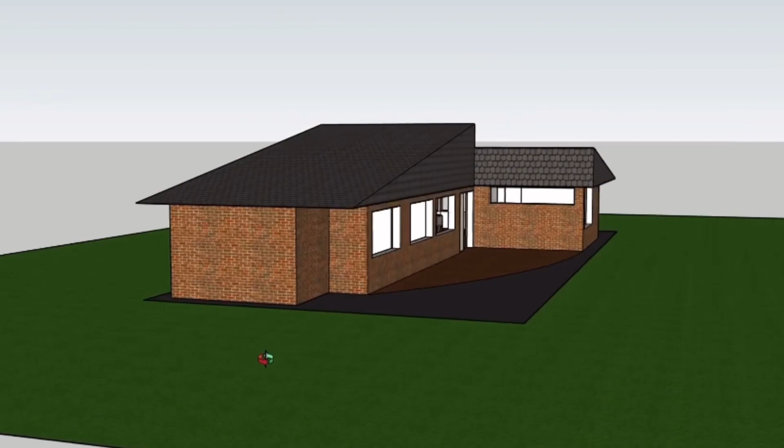Neil deGrasse Tyson is an American astrophysicist and an author of numerous science books. He has a family of 4 consisting of his spouse and his 2 independent children, Travis and Miranda Tyson. His hobbies include stargazing, reading science fiction literature, calligraphy, and wine tasting. Neil commonly appears in podcasts and television programs where he enjoys socializing and informing people about the universe.

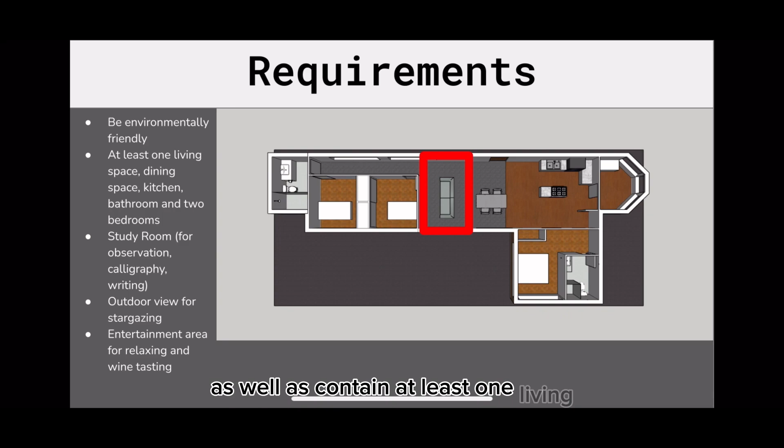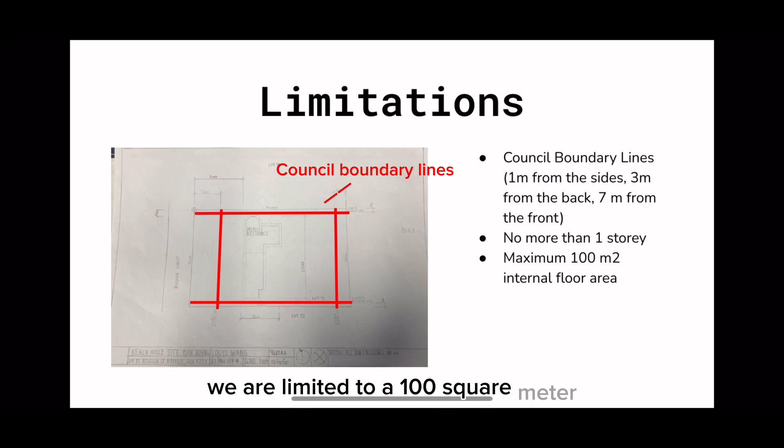Our design must be environmentally friendly and abide by open plan living principles, as well as contain at least 1 living, dining, and kitchen space, a bathroom, and 2 bedrooms. Neil prefers if we include a study room with large windows for his hobbies, a view of the beach, and an entertainment area. In addition, we are limited to a 100 square meter internal floor area, only 1 story, and the council boundary lines.

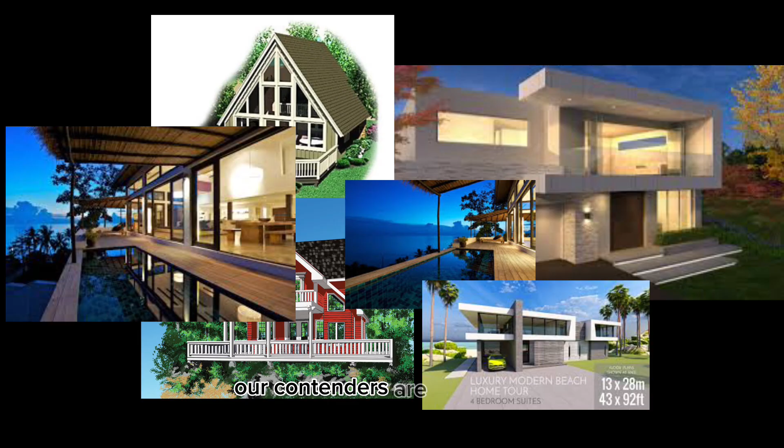When it comes to beach house designs, our contenders are the modern, tropical, and chalet designs. Considering Neil deGrasse Tyson's inclinations, the tropical design comes out on top. While modern boasts sleekness and chalet exudes relaxation, the tropical design aligns best with Tyson's longing for a warm, open space integrated with nature.

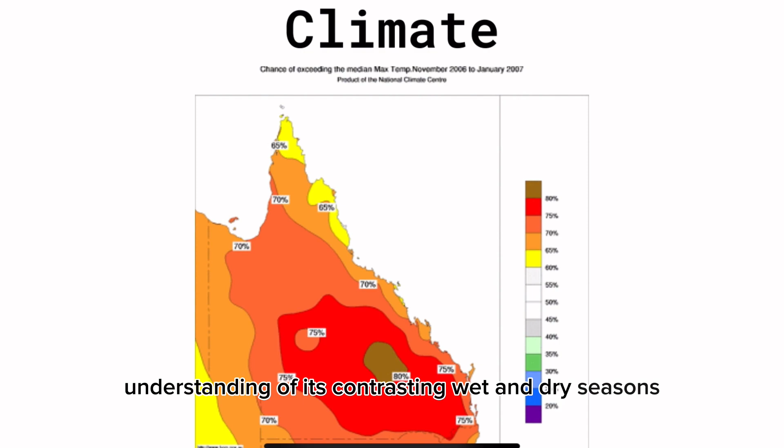Designing a beach house in Northern Queensland requires an understanding of its contrasting wet and dry seasons, with humid summers and drier winters. Annual rainfall averages around 616 millimeters, with northern and coastal areas receiving the most. This hot and humid climate favors passive cooling and optimizing placements of windows for cross-ventilation.

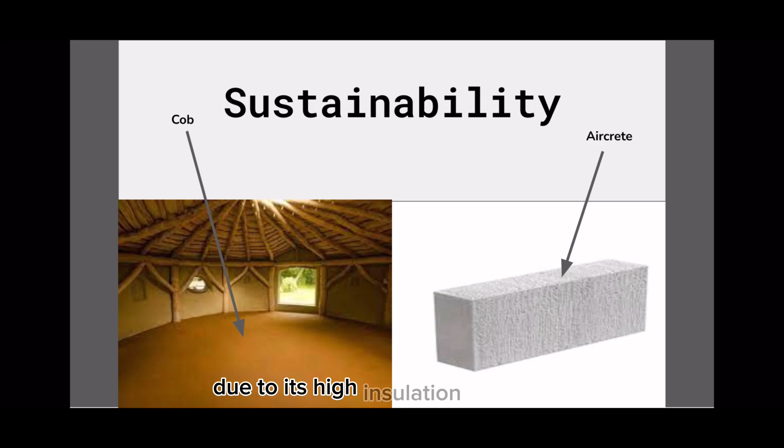Crafting a sustainable beach house hinges on material choices. For example, we chose flooring mainly consisting of aircrete due to its high insulation properties and somewhat low thermal mass. However, in areas not exposed to sunlight, cob can be used due to its high thermal mass and low insulation, drawing heat from the air into the ground.

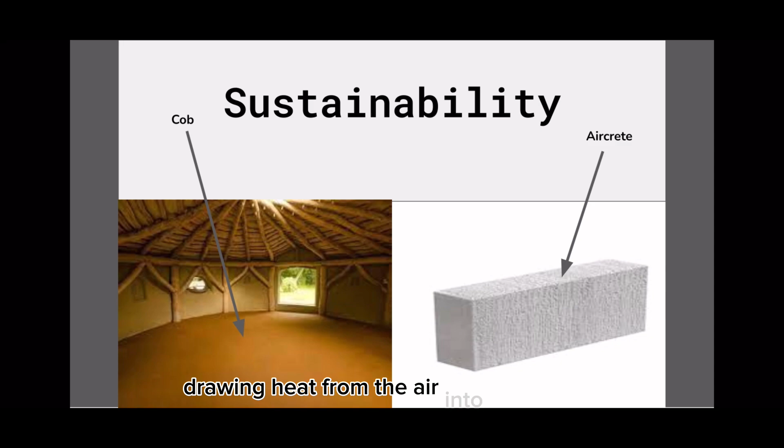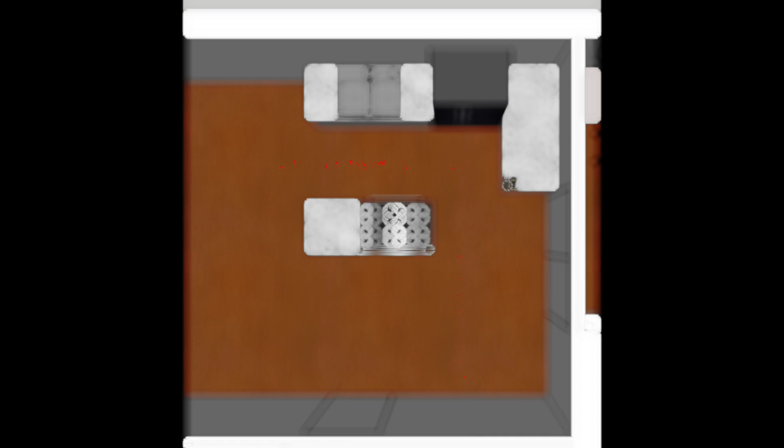As the final research and decisions were locked in, our team began our concept development, which was split into 4 phases.

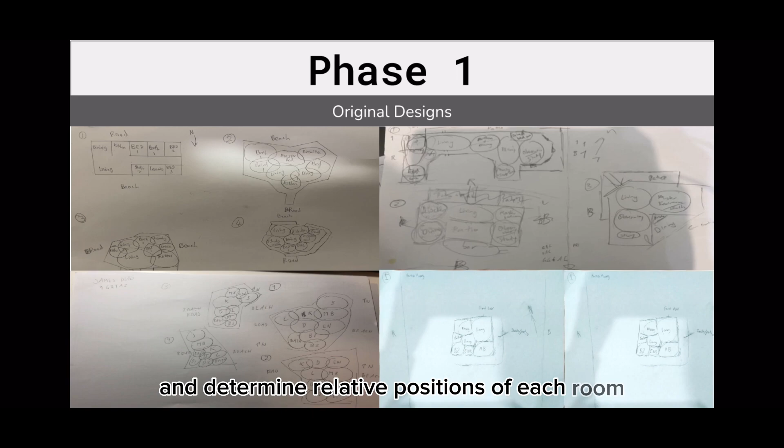Phase 1 began with us quickly sketching out preliminary designs with minimal form to brainstorm ideas and determine relative positions of each room. Phase 2 was to scale sketches on grid paper, which helped us find out which designs were in line with the 100 square meter restrictions and investigate the effectiveness of different room shapes.

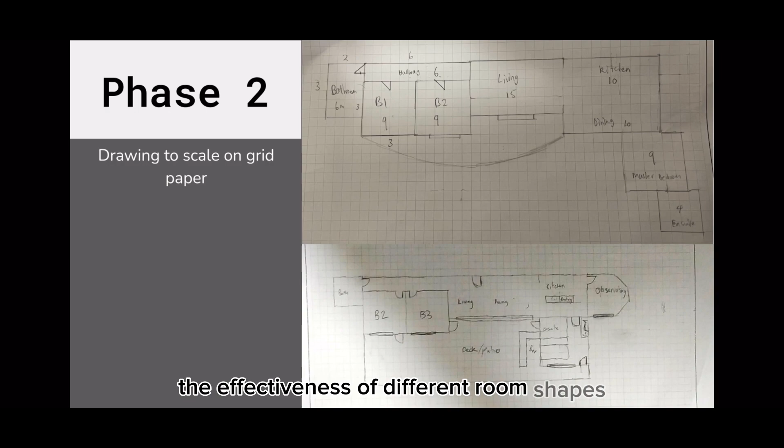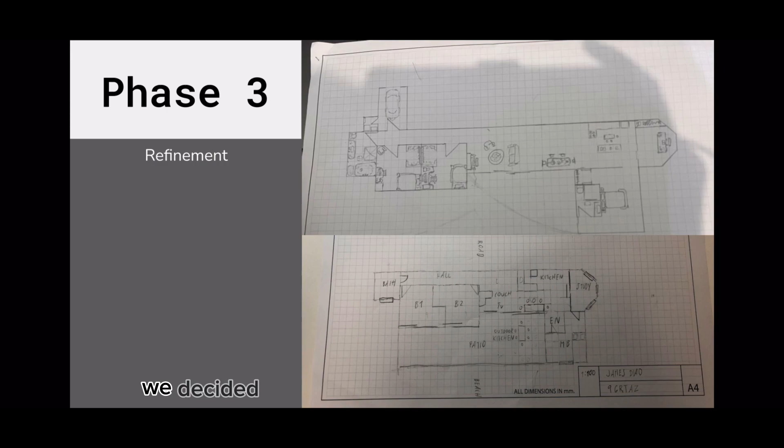Phase 3 was a refinement of each design, which included finalizing room areas and trying out different furniture arrangements with CAD. After testing of designs, we decided on a final design we deemed suitable for our client.

After deciding on a house design, we drew up potential bathroom, kitchen, and bedroom layouts, which were later modeled in SketchUp to find the most ergonomic use of space and exact dimensions of room and furniture. These allowed us to quickly edit the position of the fixtures.

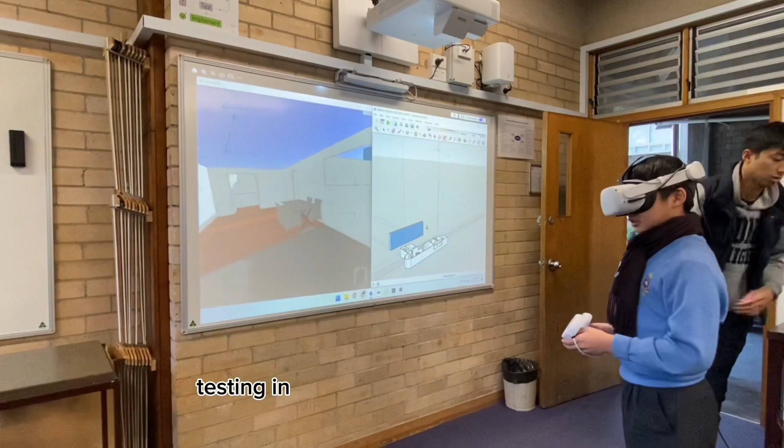Furthermore, testing in VR enabled us to experience how the designs would be used in real life and identify flaws and benefits of each design. Our tests in VR mainly focused on spacing and positioning of the furniture and window placements.

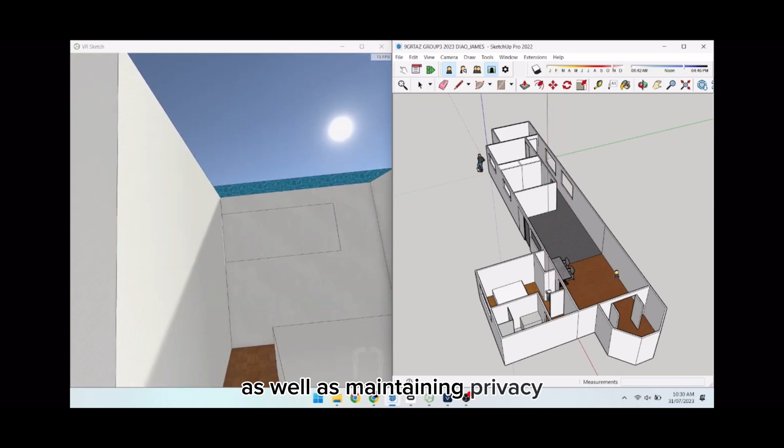In our master bedroom, we settled on a design which allowed views of the beach, sufficient space to move, as well as maintaining privacy due to the medium-sized windows. Furthermore, the placement of these windows allowed for cross-ventilation, facilitating passive cooling.

In our VR tests, we widened the living, kitchen, and dining room areas to allow for enough space for furniture and added windows to the hallways to make it feel more spacious.

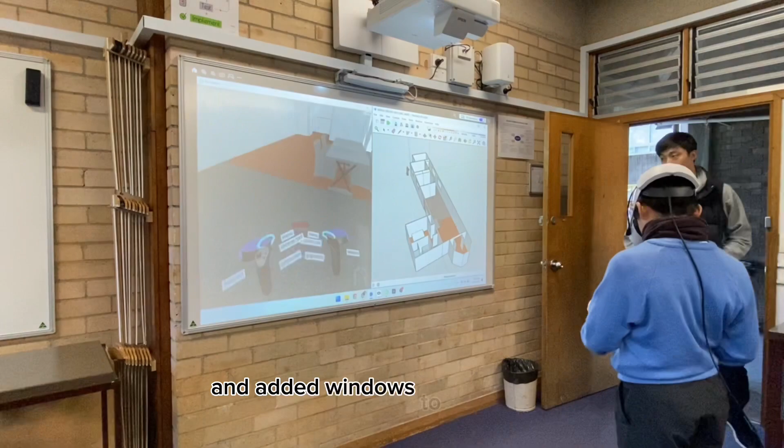This testing and editing of our design culminated in us drawing 4 formal technical drawings: a site plan, a floor plan, an elevation drawing, and a planimetric drawing.

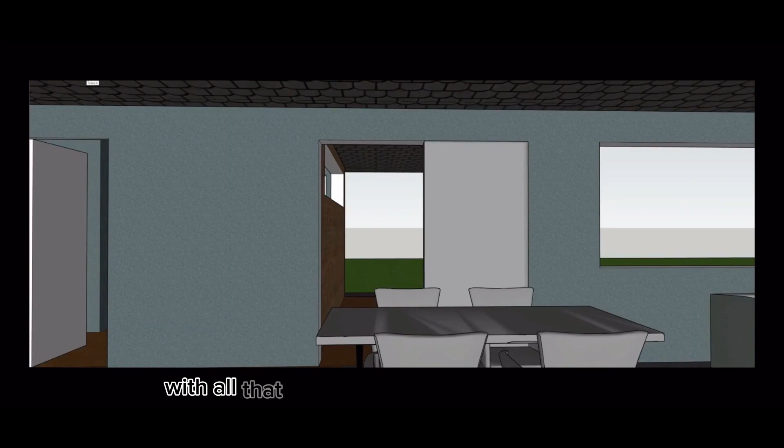With all that being said, this is our final design.